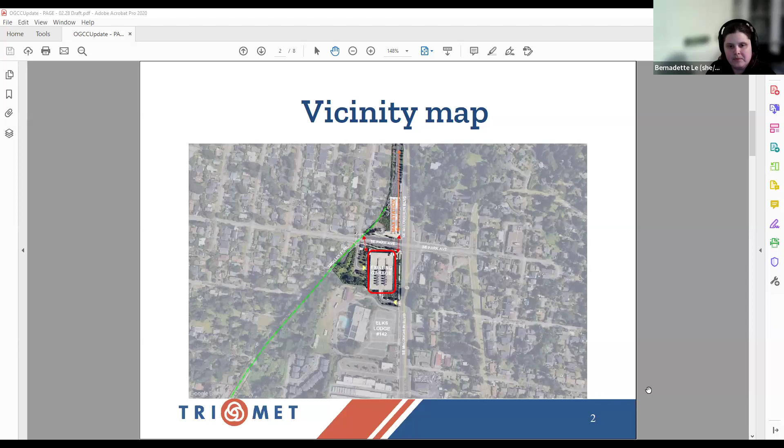So our current schedule: our design phase is now complete, and we are getting close to construction. You'll start seeing folks working at the site in the next week or so. And work will start with things like setting up fencing around the garage and adding overhead protection at pedestrian entrances. In the first phase, crews will also be preparing the staging areas, doing things like clearing the areas, laying down an access way between the Elks property where we'll be doing some staging in that top level of the parking garage. And they'll be adding some temporary surfaces on the west side of the garage so that the equipment they need for the project can be placed there.

So we do expect that there will be some vibrations when they install the gravel crane pad and the laydown area. I checked in with the project team and they are choosing equipment that minimizes this as much as possible. And the work is anticipated to last no longer than a couple days and will be limited to normal standard workday hours. In mid-March or so, you will also see crews starting to remove concrete from the pillars on the top floor so that they can access the metal rebar and eventually extend to the additional floors. Throughout the project, we will provide notice to neighbors if any work requires a noise variance, but at this point, I did check in with the project team and there's no work that meets that level at this time.

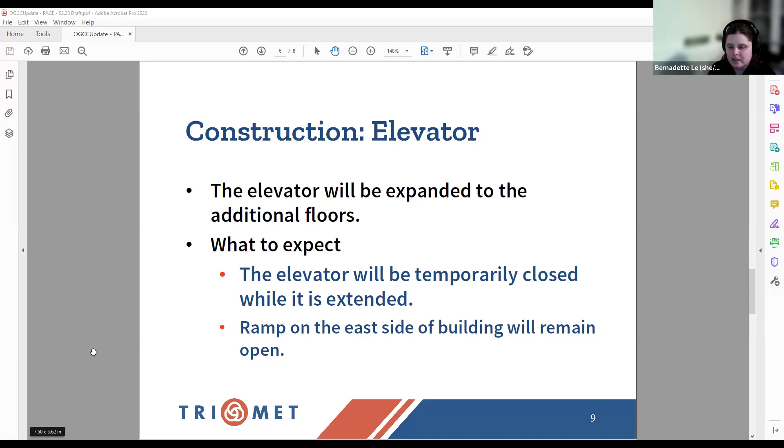I also heard some questions last month about contact information. So I wanted to present this to everyone. Here is my team email, communityaffairs@trimet.org. If you have a question during normal business hours, our phone number is 503-962-2150. And if there's any construction emergencies that come up after hours, our phone number is 503-962-2222. And our project webpage is trimet.org/ParkAvenue.

So with that, I will say thank you. I'm going to stop sharing so I can see everyone. Does anybody have any questions? Thank you, Bernadette. Yes, if you have a question, you can use the raise hand option or just raise your hand. Okay. Well, if anything comes to mind after and someone wants to reach out, please feel free to email or call.

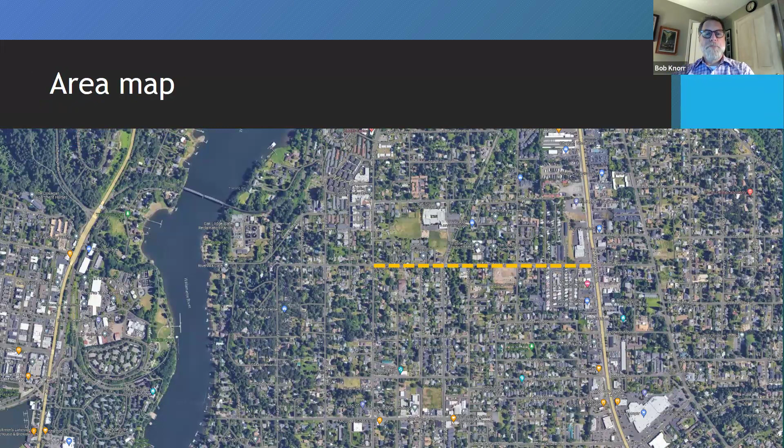As you know, Courtney Avenue is in the relatively northern half of the county there. It ties in with 99E or McLoughlin and runs east-west, the western terminus there at River Road. Many of you are probably aware of the trolley trail network. We're going to take a look at the existing crossing there at Arista and make any sort of enhancements that we can to improve flow of traffic, not only for cars and vehicles, but pedestrians as well. Some of the ADA standards have changed in the last year here, and we'll be applying those new standards to the project.

So it's a safety improvement project. I think it'd be a huge improvement, separating vehicle traffic from pedestrian traffic, making safe places for bikes, pedestrians, and vehicles. Every project seems to entail management of stormwater. They're actually under design right now, looking at the existing stormwater system and making improvements, adding new storm pipe, catch basins, placement of such. But also, in this case, we have some new planter strips and we're putting in rain gardens as a way to address and deal with added stormwater.

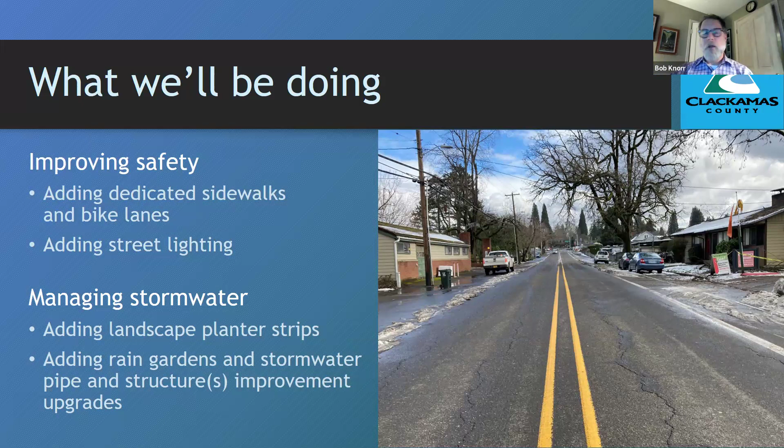When we widen roads or add pavement, we create a condition we call impervious surfaces, where the water can't get through to the ground to absorb. That water runs off, and we have to deal with that. One of the ways on this project that we want to do that is through what are called rain gardens. You've seen those driving around Portland and in the area as well. They're depressed concrete wells with planter strips and plants, and give the water the ability to absorb.

There's a question, Bob. Yep. Do you want to take that question now, or do you want to wait for questions at the end?

Happy to take a question right now. Okay, Bob has his hand up. One of the things you said just a couple of minutes ago, you were talking about the design process taking a while. I was kind of surprised at how long it's taken. It's a pretty short strip of pavement there, essentially. But you said something about looking at completion in 2026. Did I hear that correct? You did. And just like the Jennings Avenue project to the south there, that took about 2.5 years.

And when you have federal aid money involved, the review process that ODOT and the Federal Highway Administration go through is more rigorous. You have to do a number of environmental studies up front. That takes anywhere from 6 months to a year. You have to go out and do investigations, desktop studies, and field work, bring that information back and write reports. Those reports then are presented to both ODOT and the Federal Highway Administration for review and comment back and forth.

So that involves, as mentioned, hazardous material. There's soils in the shoulders that need to be reviewed for hazardous materials such as copper, lead, and zinc that come off the brake shoes on your cars. So that soil has to be reviewed, and we decide what to do with it, either dispose of it or bury it underneath the sidewalk and contain it. There's historical studies, archaeological studies, and a number of different studies that are involved in the environmental phase.

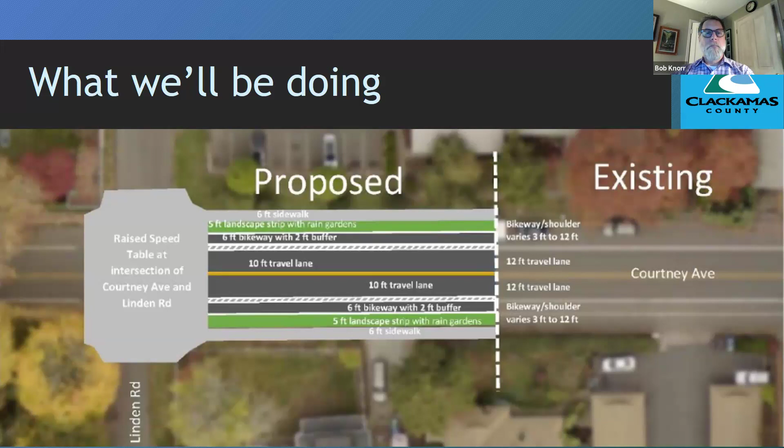I'm looking here at that raised speed table at the intersection of Courtney and Linden. I'm not sure we're having one there. We're having one at Arista, so we'll review that. Both intersections. There's two speed tables. Sure. Okay.

Paving the road. Let's see. Widen portion of the road within the project limits. People have asked whether we're going to overlay the whole roadway, and the answer is, as written there, we're not. That wasn't part of the original scope or grant dollars. We've got limited funding, so the intent is to widen and pave where we've widened, all within the existing right of ways as best we can.

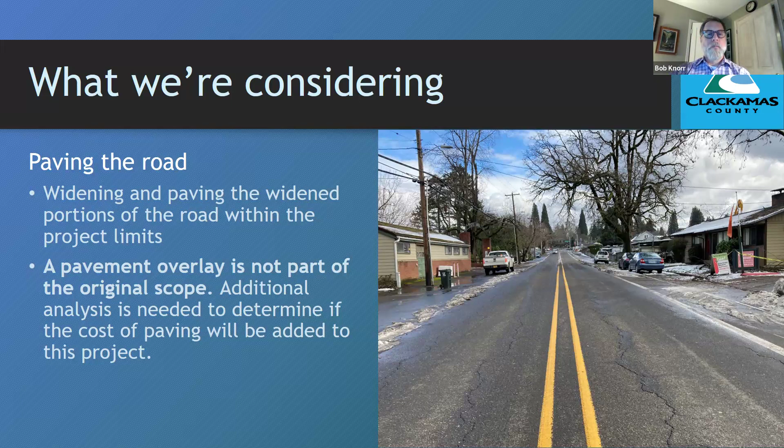We're looking at two options right now. The original scope of work was for no parking, because we're adding a landscape strip and we're making drainage improvements. So that doesn't allow us an opportunity. We needed to remove parking. However, we've received some feedback from folks about parking, and so we're making an attempt here to look as to whether we can provide parking or not. It's still under review at this time.

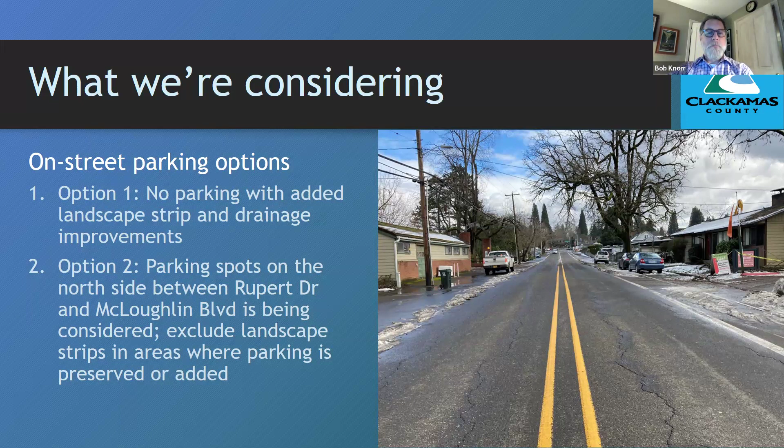Wanted to show you just real brief, there's a template here, a typical section of what we're talking about. I don't know if you can see real well in that lower corner there. We've got two travel lanes. They're two 10-foot wide travel lanes, and then the bike lanes on either side, 8-foot total. After that, to the left or the right is a planter strip where the rain gardens are, and then the sidewalks.

Where we are able to, if we do add any parking at all, we are considering some in front of the apartments to the east of Arista, between 99 and Arista. It would be on the north side, a limited number of parking. What it means, though, is reducing the bike lane, and that's a concern for us from a safety standpoint. There's limitations on this because we're trying to work within our existing right-of-way.

We have another question from Thelma Hagemiller. Can we take her question? Sure. Bob, what treatment are you planning where the trolley trail crosses Courtney? The existing treatment is a raised speed table, I think, right now at Arista. And I wanted to, oh, I know how I can do this. Okay.

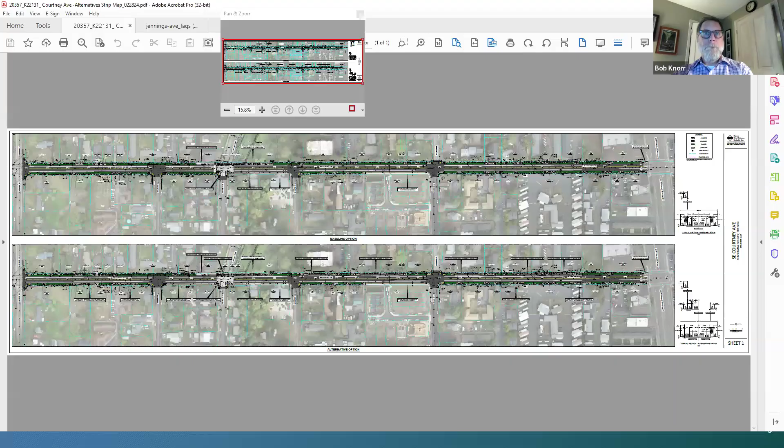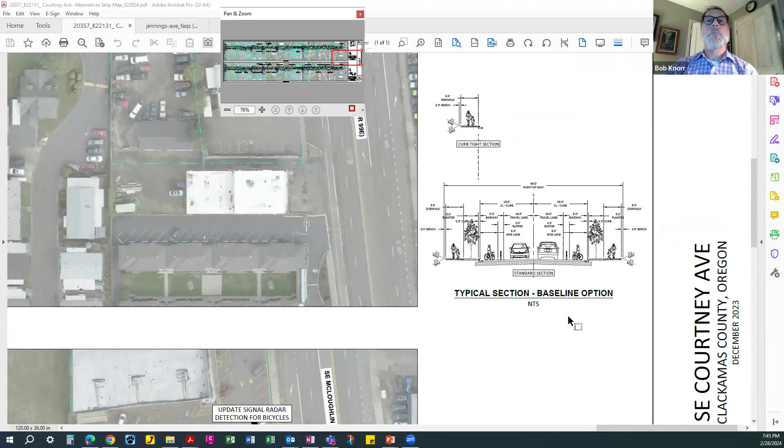This is the current, we call it a strip map. The consultant has put this together, and I wanted to show it to you briefly. Again, here's that typical section for what we call the baseline option. It is the typical section that we're utilizing per the grant and what we've committed to. If you travel down the roadway here to Linden and Arista, there's the trolley trail. There is an existing, we call it a speed table. It's kind of a raised concrete section in the roadway.

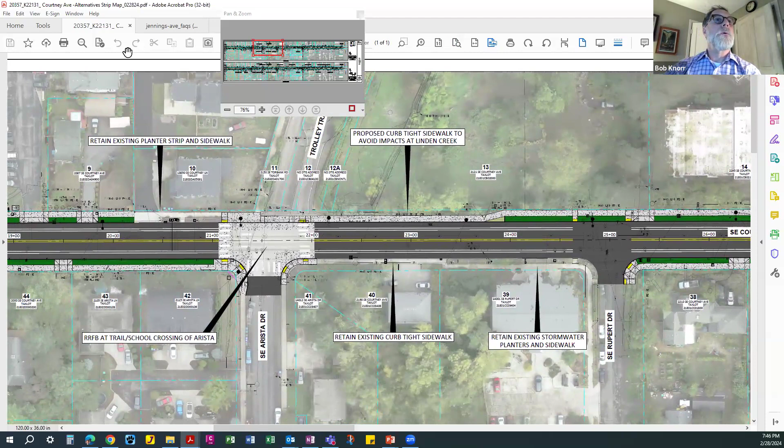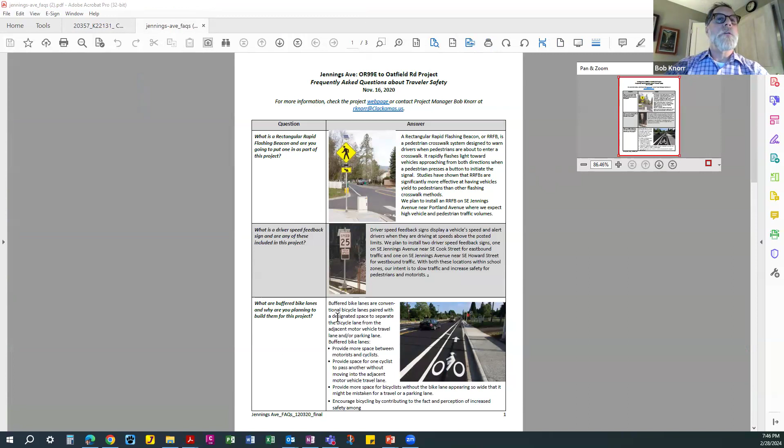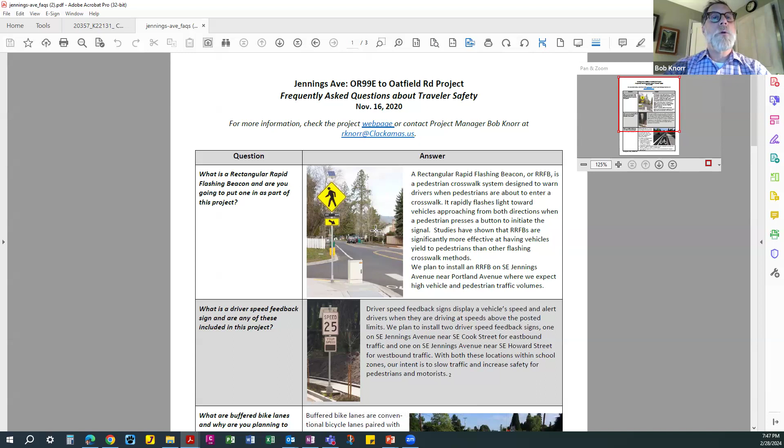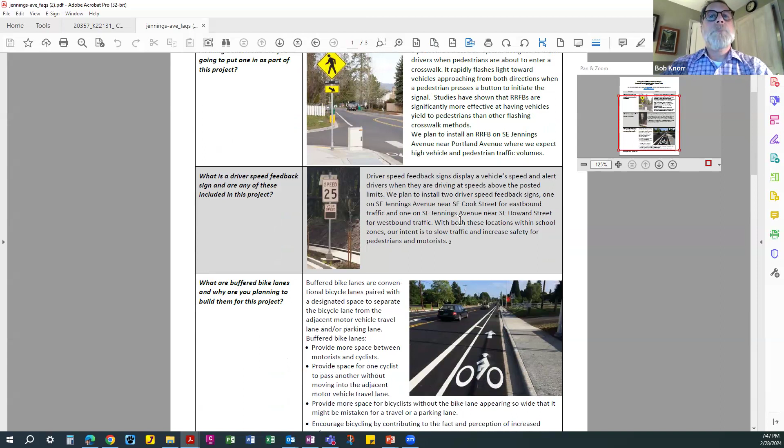A rectangular rapid flashing beacon is shown right here on our Jennings Avenue project. We're just going into construction right now for Jennings Avenue, but we are installing one of these there. I grabbed this off of the website so you can see what a rectangular rapid flashing beacon looks like. If we do put driver feedback signs on Courtney, they'll look like this too. It gives feedback; all of you folks know and see these devices. Here's the buffered bike lane, something that we're considering for Courtney. And that's what I wanted to share.

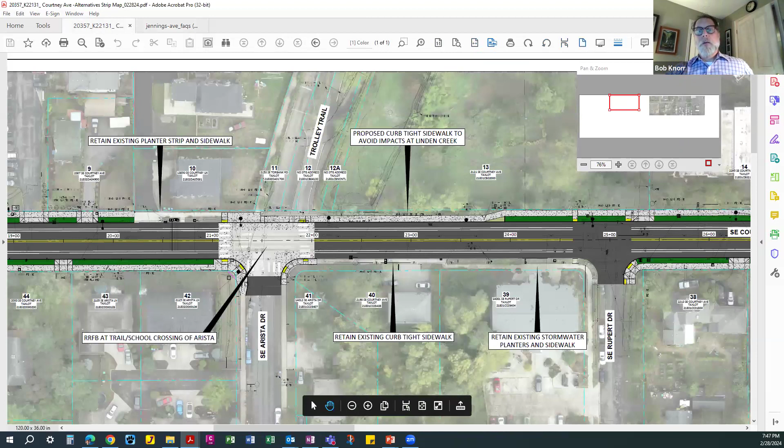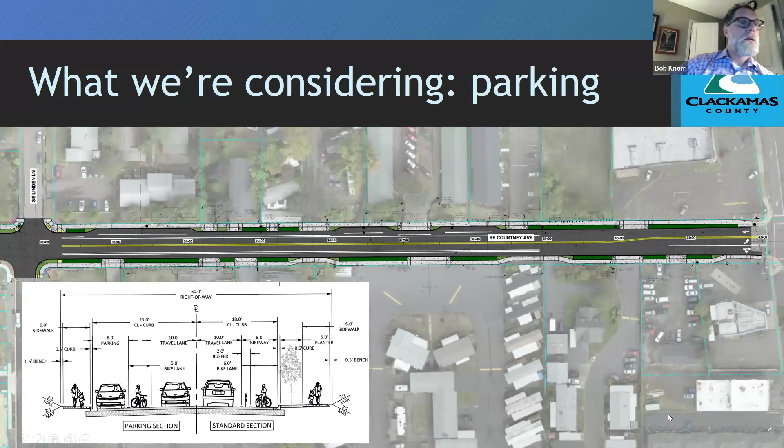We have another question from Eleanor Hunter. Sure, Eleanor, go ahead. Yeah, hi. You had a picture just a little while ago showing a cross section of what the street, there you go, down there. Yeah. I'm just wondering, is that something that is going to be the standard for projects going forward? Like, is this unique to Courtney? It seems like it incorporates a lot of things we've been hearing for some years about the desire for bike lanes and swales and things like that. So I just wonder if this is.

Yeah, let me stop. Oh, wait, maybe I can do this. If I move my dialog, can you see my notes there in my dialog box? I do not know. Okay, no. I need to switch. I wanted to just share with you what a cross section looks like. So let me take care of something here.

Oh, just about there. Hold on a second. Okay. You're doing great. It's always a challenge. Oh, I stopped sharing. That's what I did. What do I want to share? I want to share this screen. Okay. Are you able to see the map? No, you're not sharing right now. I have to press the share button, don't I? There you go. Okay, yeah.

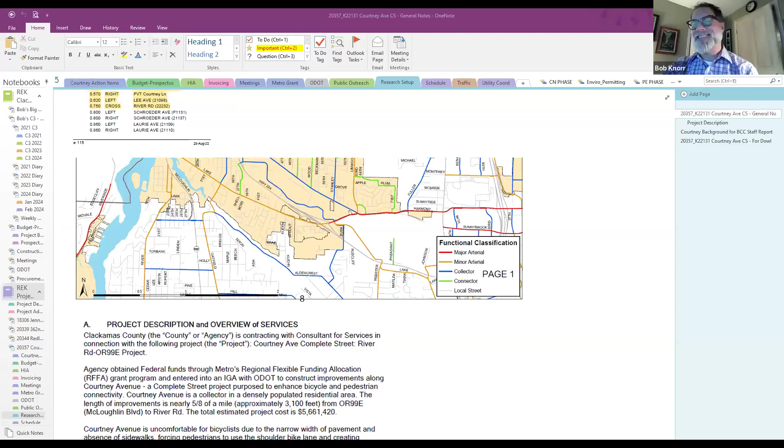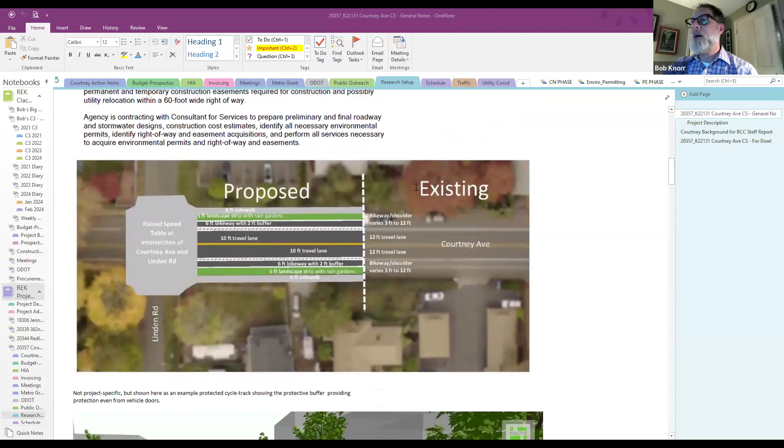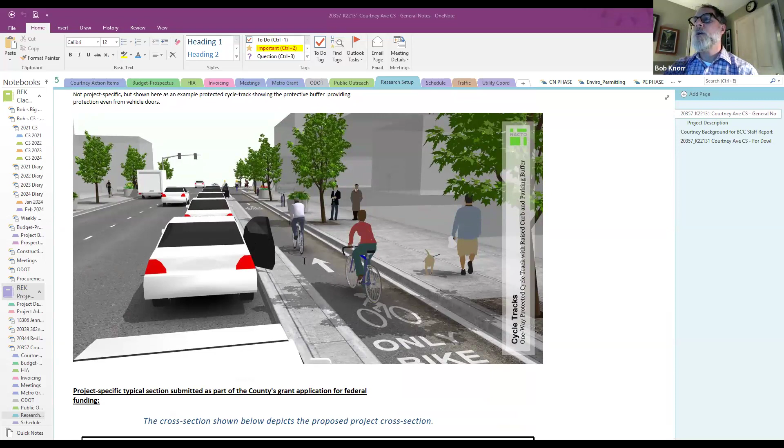All right. When I start a project, I always create lots of notes for myself so I can remember what I can't remember. Right, I follow you there. There's a lot of information to keep track of. So in addition to the project description, which we've been talking about, and what was in the grant application, there are some of the safety concerns that we have about bikes and cars next to one another. One of those is doors opening on vehicles. So we are creating a buffer, not necessarily a raised concrete one, but a painted one at this point.

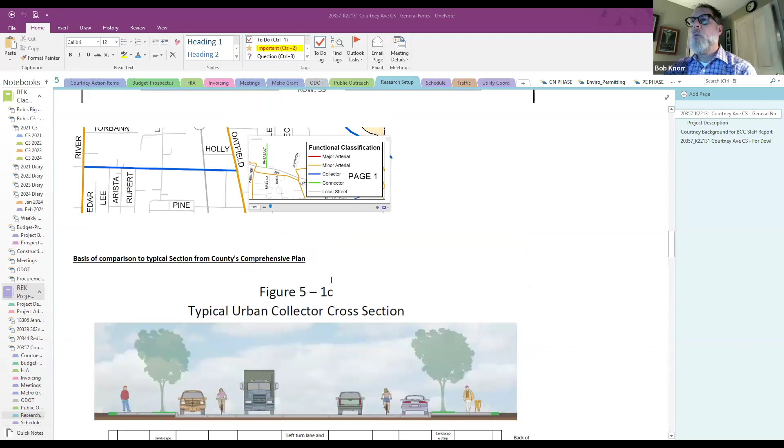The cross section for this project is this one. It's a modification of what's in our comprehensive plan. The comprehensive plan is being updated, I believe, or at least the TSP is. But this is what an urban collector cross-section looks like. You've got 2 travel lanes, a median in the middle, bikeways and parking. And we start from there. This is our standard. For this project, we started with the standard, but then we modified it where appropriate for the urban section and the amount of right-of-way that we have available to us.

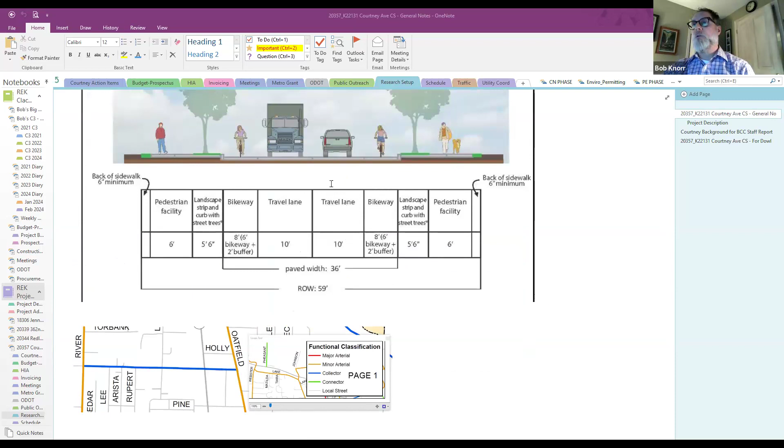And this was what was presented in the grant application: 2 10-foot travel lanes, an 8-foot bikeway, a 5.5-foot landscape strip, and then 6-foot sidewalks. And if I roll back up, that's what you see right here. Now, have I answered the question, or did I evade again?

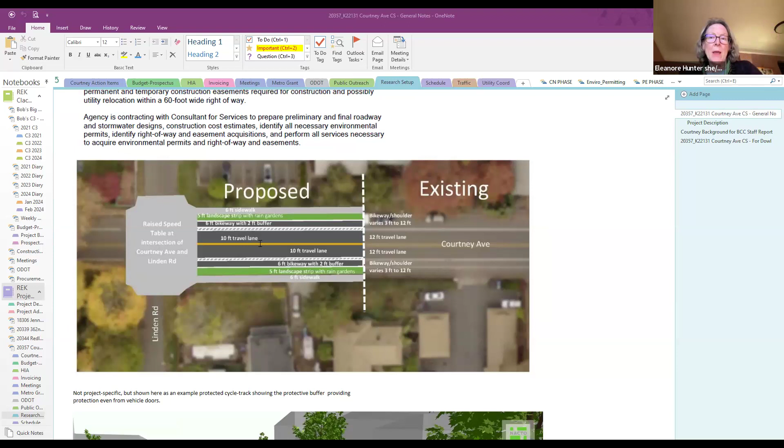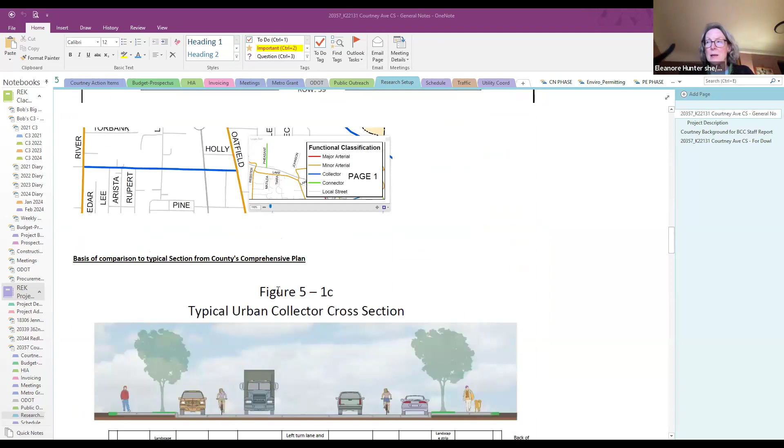Not really. My question is, is this proposed standard something that may be used in other projects that are part of the bike ped network, which we understand is bit by bit getting filled in a way that's beneficial for the community, like safe routes to schools and that kind of stuff? So is this going to be a template that we might see in future projects, or would it be different for each project?

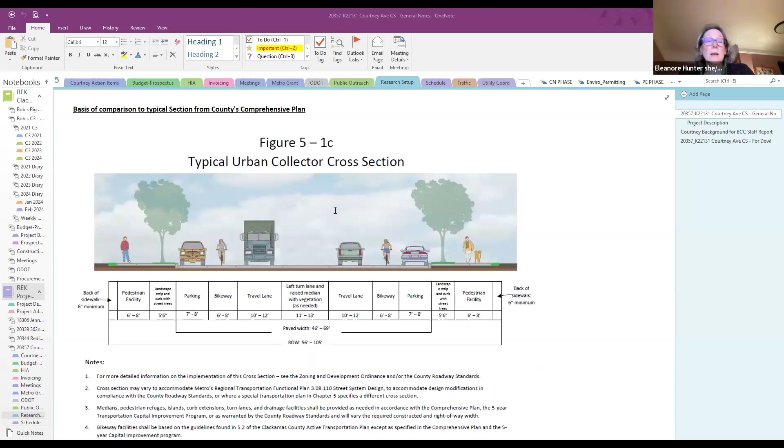They're a little different for each project, as was stated. This is the template right here, the typical urban collector cross section, and I have to kind of dig for this myself when I go onto our planning website. Okay, but then it's adapted depending on where the projects are. Okay, great. Thank you. Yep. Thanks. You betcha.

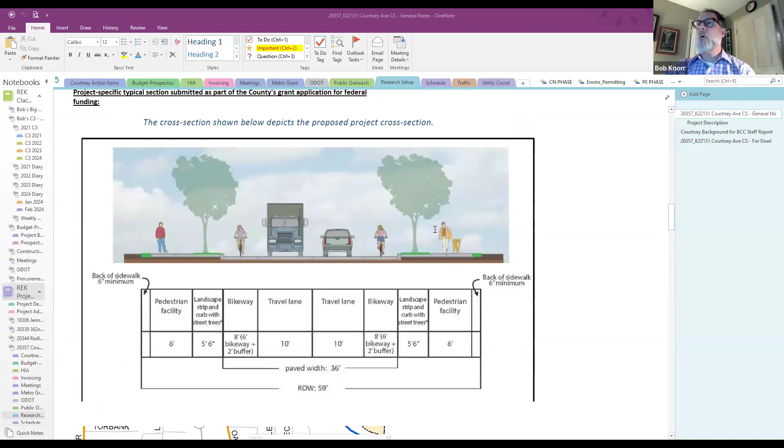Let's see, stop sharing. I have another question from Greg Wennison, and then we probably better let Bob finish his whole presentation. Greg, you want to go? Yes, I was looking at the overhead from Google Maps, because when I drive down this, I don't really pay that much attention to the trees, but there are mature trees along this area here. Are you planning to remove them or work around them?

Are you able to see the PDF that I put up, the strip map, or are you looking at my PowerPoint presentation? We're looking at your strip map, Bob. Oh, good. Okay. I can't always tell. It behaves differently. So on the strip map, to answer your question about trees, let me think about this for a minute. This goes all the way to River.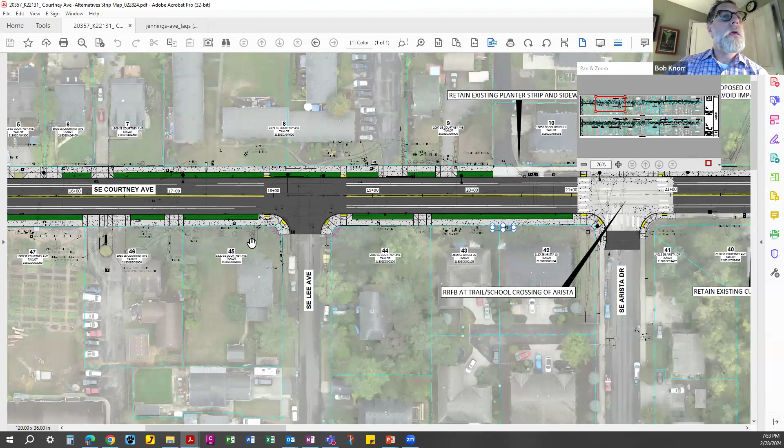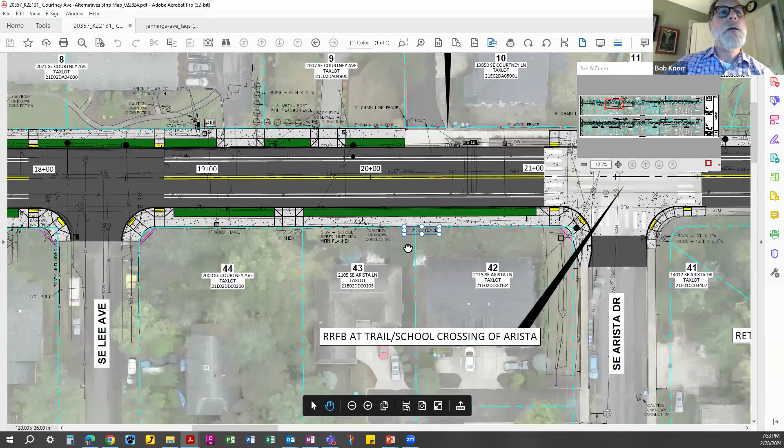The baseline option shows us putting planter strips in along the edge of the bike lane. The green is the planter strip, and the sidewalk is the gray with the little black dots. Okay. That would require us to take out more trees, I think, than not. I do see some trees here, if I could zoom in a little bit with my bubble. You can see the tree symbols right here. Can you see that little star?

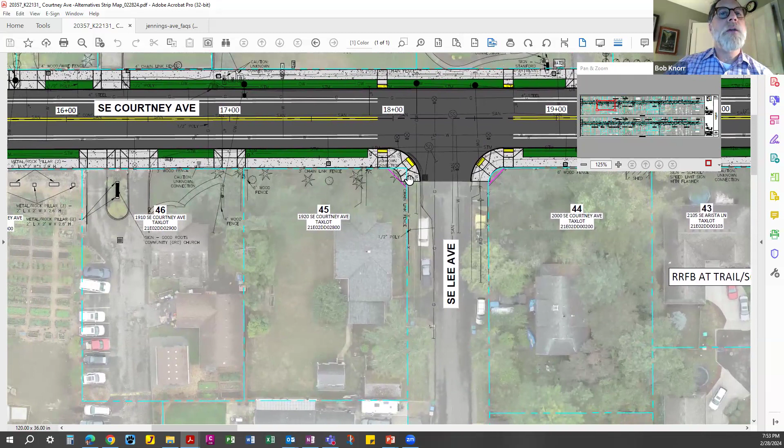Most of those trees are on private property, and the property lines and right-of-way lines are the blue long, short, long dashes that you see right here. Not a perfect overlay, but we did have survey out there, so they're pretty well tied to where they're located. The conversations I've been having with the design engineer with Harper Houf are about trying to preserve some of those trees.

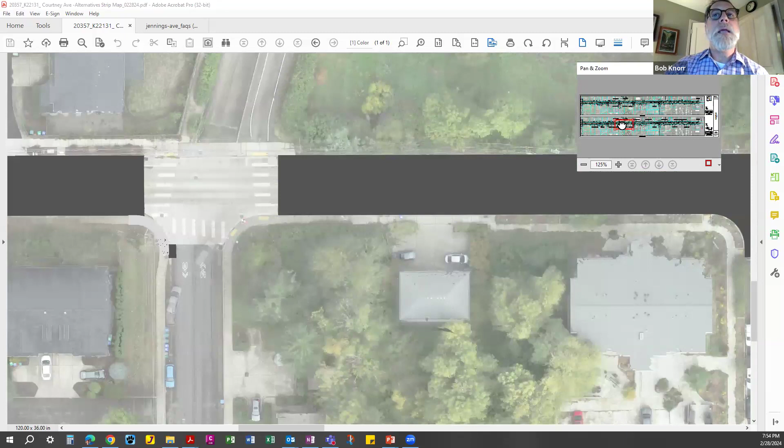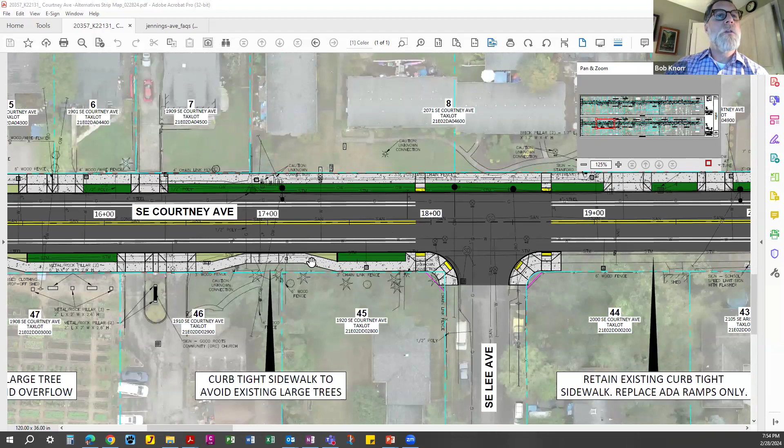So in option B, we are talking about not only considering some parking to the east of Arista, but also intermittent curb-tight sidewalks. So unlike the baseline option above, the alternative option shows some of the sidewalk jogging back and forth. Can you see that there? Yep. And that's to avoid trees that are real close to the property line. If we brought that sidewalk real close to the property line like in the other option, we're concerned about it damaging the roots.

How do we really quantify that? Right now, what I can tell you is that we would hire an arborist to go out there and analyze that for us better. Okay. But we are paying attention to trees. I want you to know that. Thank you. You're welcome.

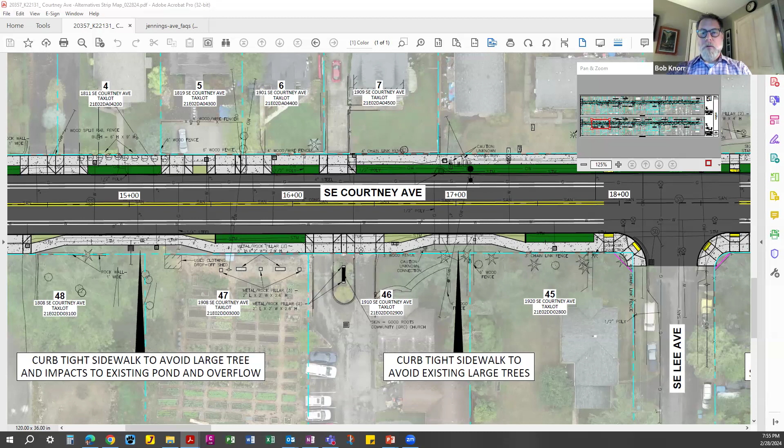You folks are always welcome to go to our project website. We're meeting with you here. Cameron puts together great social media. We do send out emails, mailings. You're always welcome to call me directly and contact us. I appreciate your feedback. And then I wanted to share with you some of the costs.

And I wanted to briefly just share with you as a sign off, just so we have a real quick look at the county's project website. And then we do have one more question. Yeah, you bet. Let me see if I can see what I'm trying to see here. Oh, no, I'm still trying. Well, by golly, let's see if I can move that over here and see it. Are you sharing screen? Not yet. I'm trying to figure out. I might have to abandon. Oh no, I have to scroll. That's all I need to do.

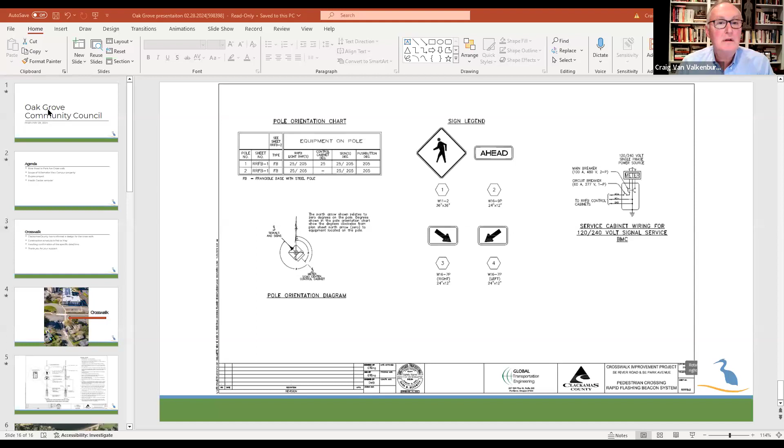Okay, can everybody see that?

Okay. Well, thanks for having me on the agenda tonight to give you an update on a lingering project and a few things that we have in the works as well. And I think Bob did a nice job of setting the stage for me to at least talk about one of the items that we have talked about in the past. So I've got a few agenda items.

I'd like to update you on the River Road and Park Avenue crosswalk. Bob showed you actually an image of the crosswalk that the county will be putting in on River Road. Like to give you a high level overview of Willamette View's campus. We've got a master site series of projects that are underway, one of which is a duplex project on Silver Springs and River Road, and something that you will see happening for a little bit more than a year is actually going to be remodeling our health center.

So you see that on River Road when you drive south, then you hit Rose Villa. On the right-hand side is our little skilled nursing unit, and then behind that to the west is our assisted living. And so we are kicking off a project to remodel those two buildings. And so I'll give you an update on that and let you know what you'll be seeing.

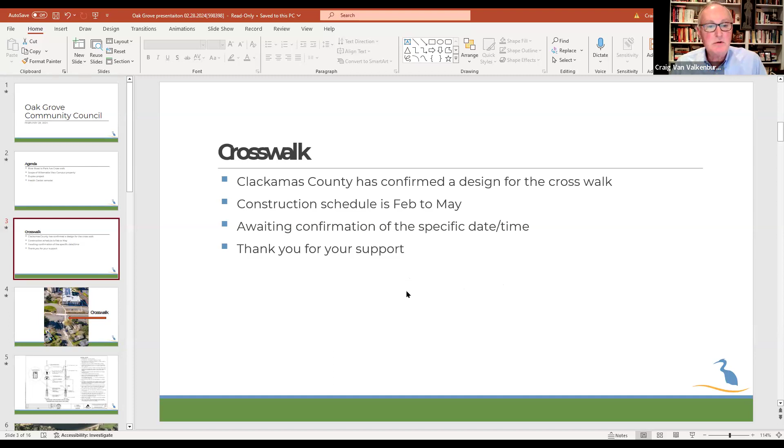So the county did come through with a design, and it was part of a grant funding. The communication I received is that the construction will be between February and May, actually probably now March and May or June. We're awaiting the confirmation of the specific date and time. I've asked them to let us know, because there's probably some things we need to do out there with redirecting traffic as well.

Gosh, probably a year or maybe a year and a half ago, in one of the community council meetings, I showed you a slide of where that crosswalk is. Now, the white lines on the road are not there. They're ones that we drew in just to show where that crosswalk will come across the street. But that is the site for the crossing. And so it'll pick up on the sidewalk on the west side of River Road, get people across the street, down Park Avenue, and vice versa.

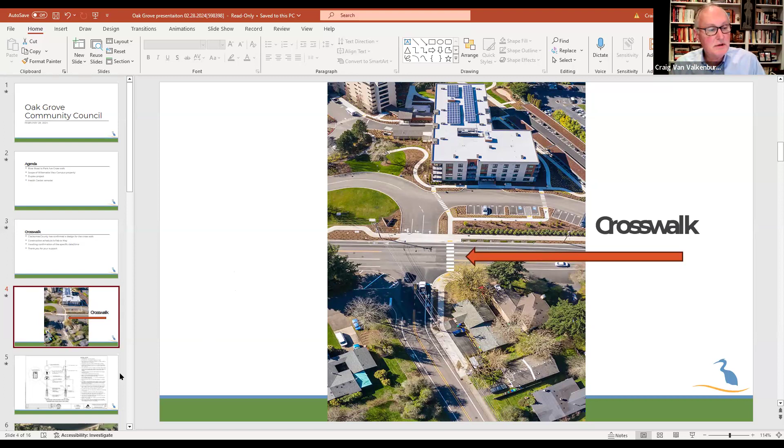And Bob had showed a picture of the rapid flashing beacon system. That's exactly what will be going in on this site. So it'll be one on each side of the road. And it's got the kind of dual flashing lights up here underneath the person walking, and then the directional signals. So I think it's really close to the one that Rose Villa has to go across the street. So at least we're getting another one of these on River Road to hopefully avoid any traffic issues and allow people to walk freely back and forth across the street.

So we've shared this with the Willamette View population because, like Rose Villa, we have a lot of folks that are out walking every day, and in the neighborhood, there's a lot of folks out walking in the apartments and the homes. And we want to make sure that this is a safe passageway for folks to get across this section of River Road. So stay tuned. You'll see it under construction at some point over the next few months.

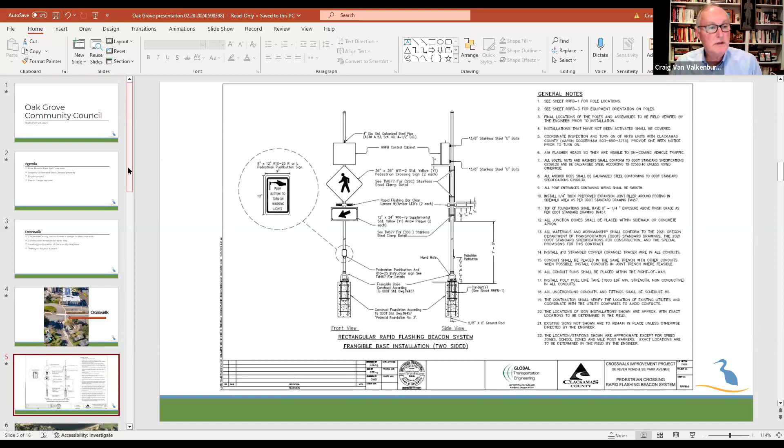We will have been in business 70 years next January, so we've been around for a long time, and this campus has evolved literally over those 70 years. The most recent project that we had was up here at the north end of our campus of independent living apartments. It's the building that's got solar panels on the top.

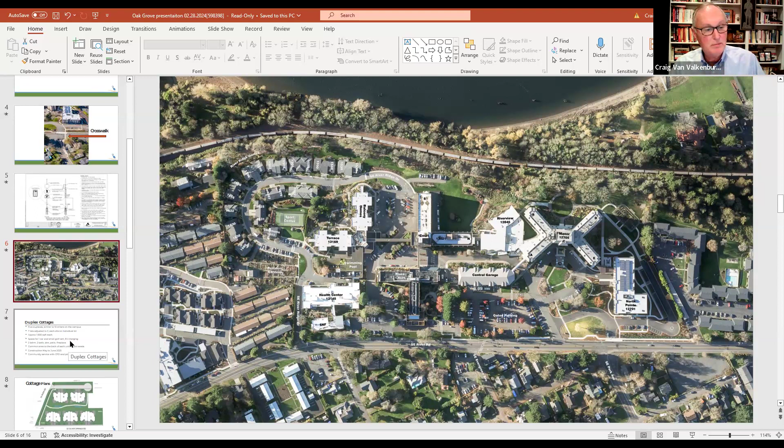Here where my cursor is, we call these River Ridge homes. These are duplex style living. We have 10 duplexes and a couple of single family homes in here. This is part of the diversity of housing that we're offering. So I'm going to jump to the next slide, which is talking about a duplex project that we have. I think some people have heard about that recently.

So it's across on the east side of River Road, Silver Springs, right on the corner. We're planning to develop 5 duplexes, which are similar to the 10 that are on our campus that I showed you. We went through a series of lot line adjustments with the county. We took 7 lots and had those adjusted into 5. You might ask, why did we do that? Well, we wanted each of the duplexes to sit on their own parcel of property for a variety of purposes.

One is some of the property lines were very oddly shaped, and we couldn't effectively situate duplexes across multiple property lines. And so we went through the lot line adjustment process. The other factor is that if for some reason in the future we decided it was better that we sold those duplexes to folks, we could actually do that and have them on a legitimate parcel of property.

The duplexes are about 1,900 square feet each. They have a 1-car garage and a small golf cart space. There'll be an EV charging station in the garage. 2-bedroom, 2-bath, den, patio, fireplace. There's a common area to the back, which I'll show you a slide for, with roof rainwater draining to somewhat of a bioswale structure. We're still in the process of working out the landscape design of it.

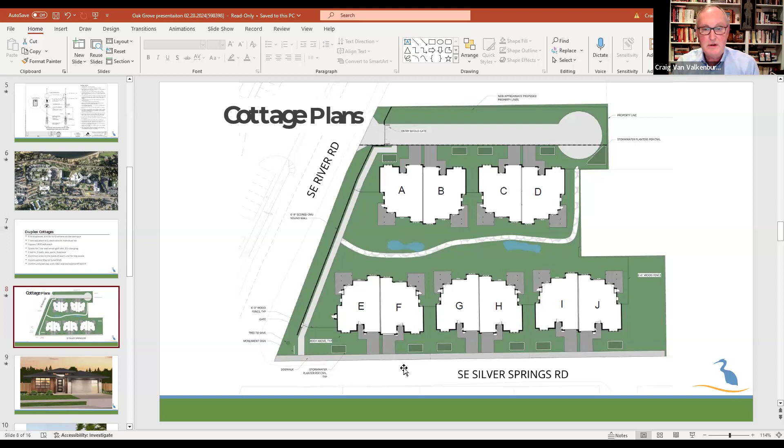Let's see, we still have some more work to do in this area. We've actually looked at maybe what a community dog park would look like over here, because we have this parcel of property that we're looking at, and we've got basically a lot of the work in the landscape area to finish off, but it just gives you kind of a general layout of what we're working on.

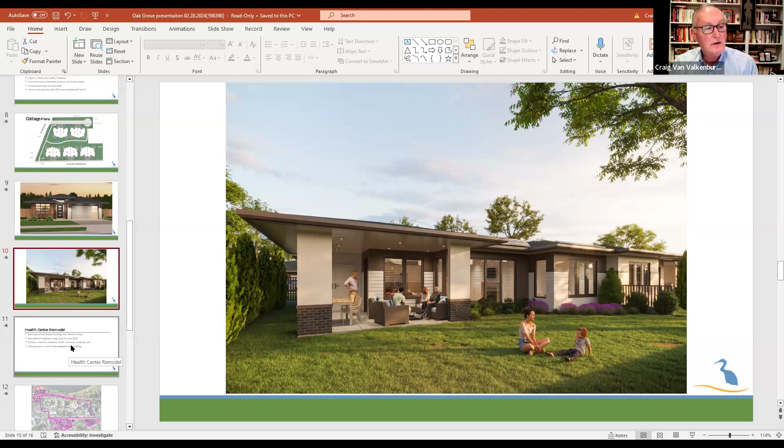Okay, I'm going to switch to our health center remodeling. We can come back and I can answer questions that you have on these projects. I do want to mention that we're going over time, so. Okay, I'll be very quick here.

So our health center project, 23 years old. We are remodeling the skilled unit and our assisted living. You can see the dates here. I'm just gonna say this is soup to nuts. It's exterior, windows, interior, HVAC, furniture, everything. We're gonna be updating it completely, so it's got another useful life of another 25 to 30 years. We're adding solar to the assisted living building. It's got a nice new flat roof on it that we're going to utilize to capture energy.

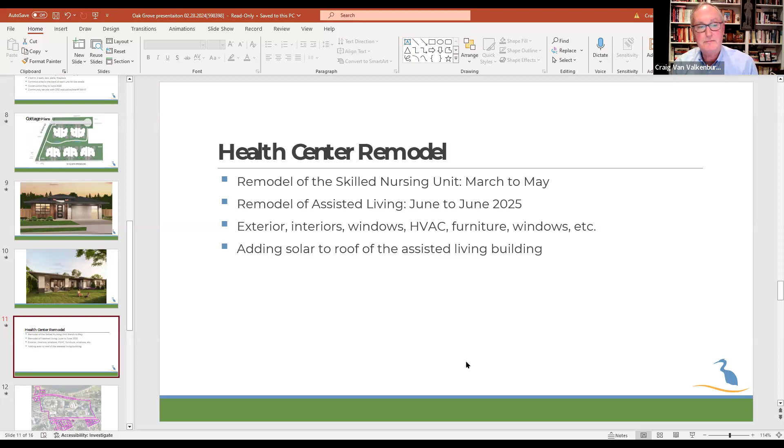So you'll see that project going on starting at the end of March. You'll see a fence and a sign, and we'll be under construction in April on that skilled unit. We're going to add one more skilled bed, from the 6 we have to 7. So, okay, that's it.

Thank you, Valerie. Thank you, Craig. Thanks for coming and sharing that. I'm sure there's going to be some other questions as we go along. And I'm going to get in touch with you because I've been getting neighbor feedback that I would like to be able to sit down and talk with you about. And people are free to email me too. So I'm happy to take any questions that folks have.

You want to stop sharing and then we can see the. Yeah. Sure. Any questions? Well, I'm sure there will be questions as construction gets started because that's the way things usually work. So thank you very much, Craig.

Joseph, do we have LUART tonight? LUART tonight is going to be a preview of LUART next month. So it'll be quick. Since we're behind schedule, it's probably just fine. So there've been some really small applications that have been going on. Nothing that's really required any kind of engagement. Just small additions to homes, with a little bit of habitat conservation area or floodplain on some part of the site. But the biggest one that's come through recently is from the North Clackamas Watershed Council.